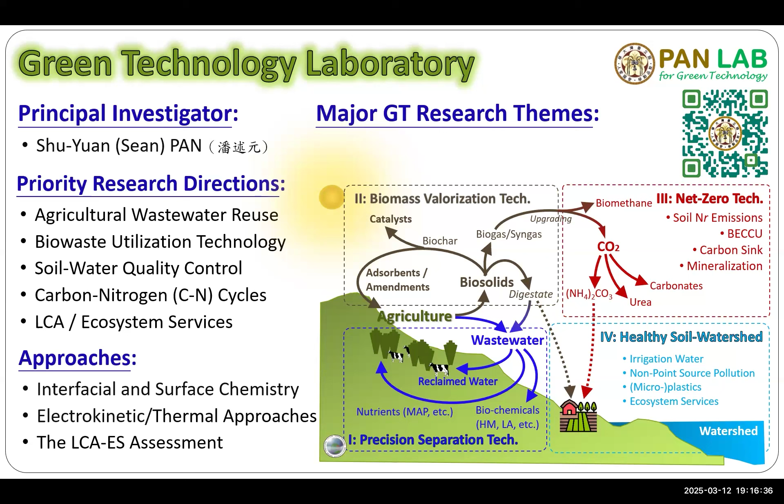Industry will sometimes discharge wastewater illegally, and this wastewater contains heavy metals. So another important domain for us is trying to identify hotspots for illegal discharge of wastewater from industry, which can impact food security and safety. So this is item number 4—basically we work on the environment in agriculture.

Today I would like to share with you about wastewater reuse. In the past 5 years we've tried to design very different mechanisms and apply them to wastewater reuse. One of the mechanisms is electrochemistry, which uses electricity to drive the reaction or separation.

You can imagine in the future green energy will be the major energy source. So the question going forward is how you can drive current processes, which today are driven by thermal or pressure, but in the future you'll need to drive these reaction or separation processes using electricity. So this is something very important.

If you see the report from the International Energy Agency, IEA, they point out the importance of electrification and its contribution to global greenhouse gas reduction. So I think this is one key research direction in my lab right now, especially for wastewater reuse.

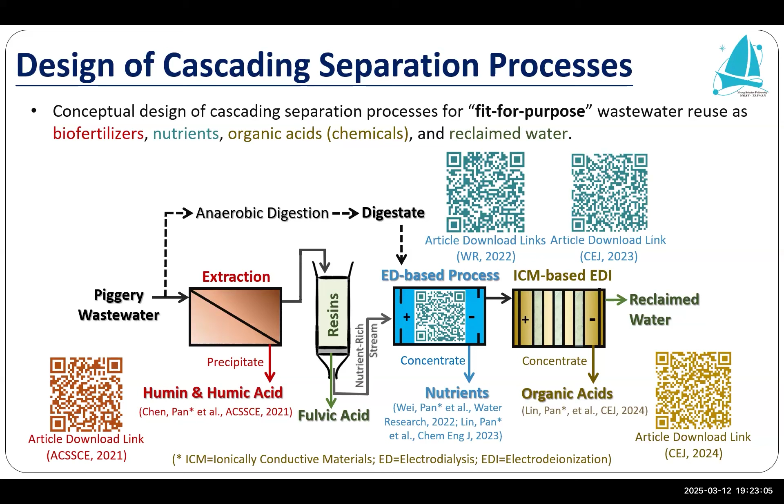For example, organic fertilizer - humic acid can actually be used as organic fertilizer, and fulvic acid can also be used as fertilizer. In addition to fertilizer, it can be used as chemicals in the pharmaceutical industry, with many applications. And nutrients - you know nutrients - are a kind of fertilizer too. So we target the purity of the product instead of just clean water in the process we designed before.

A few slides quickly showing some progress we have. The first slide shows organic molecular recovery from the piggery wastewater. As I mentioned, we use a series of unit processes trying to separate humic acid and fulvic acid by pH adjustment or adsorption using different resins. The purity is quite good - for example, humin we can get 100%, humic acid also 100%, and fulvic acid about 80 to 90%.

So far, we are also trying to apply this process to local pig farms. We're trying to have a small-scale kind of demonstration, showing the benefit to local pig farms of how this process can be used.

Another process we have, as I mentioned, is electrodialysis or ED - we can do nutrient separation using ED. One very interesting result is we can adjust the electric field and achieve nitrogen and phosphorus selective recovery. At low voltage, you can have a high removal or recovery efficiency for nitrogen. Once you remove all the nitrogen from the wastewater, you can increase the electric field to recover phosphate afterwards.

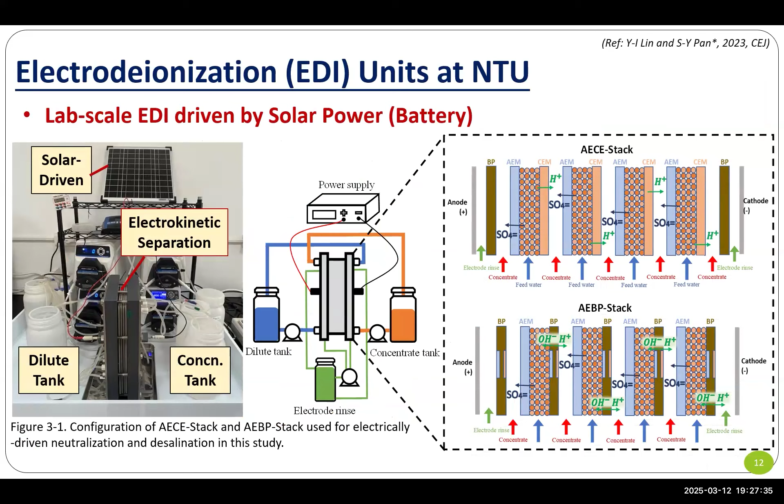We also have EDI, electrodeionization. EDI has conductive materials in ED, which is the biggest difference. Conventional EDI uses ion exchange resin to facilitate ion transfer. In our lab, we try to use fixed ion exchange materials to improve efficiency.

We also formulate different resins depending on what product we want and the concentration of the product in the wastewater, so we design different materials. One simple concept is: wastewater in, and you get three products out. One is acid, one is alkaline chemicals, and another is clean water. You can use these three different products in many different locations.

One example is the PET washing industry in Taiwan. They use chemicals for washing and produce wastewater. Right now they use a pressure-driven membrane process to treat wastewater, and we try to incorporate this new technology into their current process, generating chemicals that can be used back in their original process to wash the PET bottles.

I think this is a very important process, especially for industry, because we estimate the cost for the industry can be reduced by 90% every day, since they purchase a lot of chemicals daily and also pay wastewater treatment fees. So by doing this, you can avoid a lot of fees for industry.

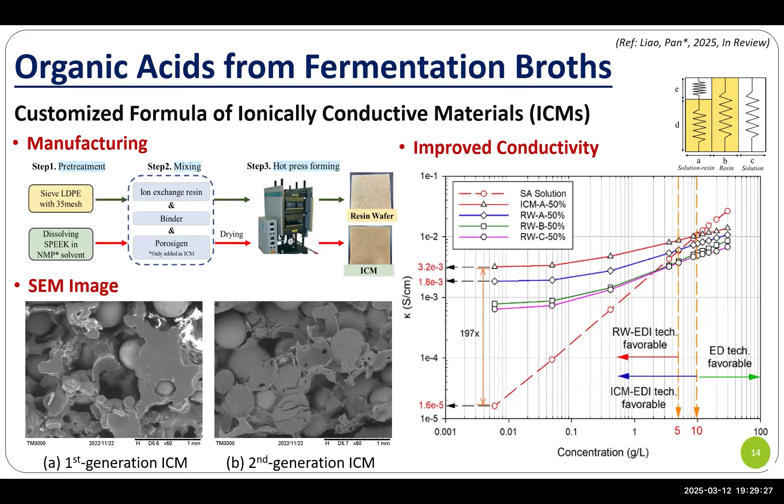This is the detail for the materials, but because of time I'll just skip the detail. The concept is we try to formulate different types of materials for different purposes, using different ratios of anion exchange resin, cation exchange resin, and binders. We need binders and also porosigens, and we try to design different formulas and evaluate the performance.

One target is fermentation using biomass growth. In anaerobic fermentation broth, you can produce organic acid, and succinic acid is one example, a very highly valuable product. We try to use the materials mentioned in previous slides to increase the performance of succinic acid recovery from the fermentation broth.

We also use the same materials for wastewater in the pig industry, but to recover ions, so different targets. So this is something we have worked on in the past.

The last slide today: we also try to work on something I feel is very exciting, because in the past, when you treat wastewater, you think we need to input more chemicals or energy. But we realize we can utilize the energy stored in the wastewater. At the same time, you can produce energy and also treat the wastewater. So this is what we call energy-extracting water technology.

For example, with neutralization, you generate a lot of heat because of the reaction. How can you utilize that heat to drive separation? This is the concept behind this technology. Or think of a battery, since it looks like a battery - a battery produces energy. So we also design different configurations of electrochemical separation that can produce energy at the same time.

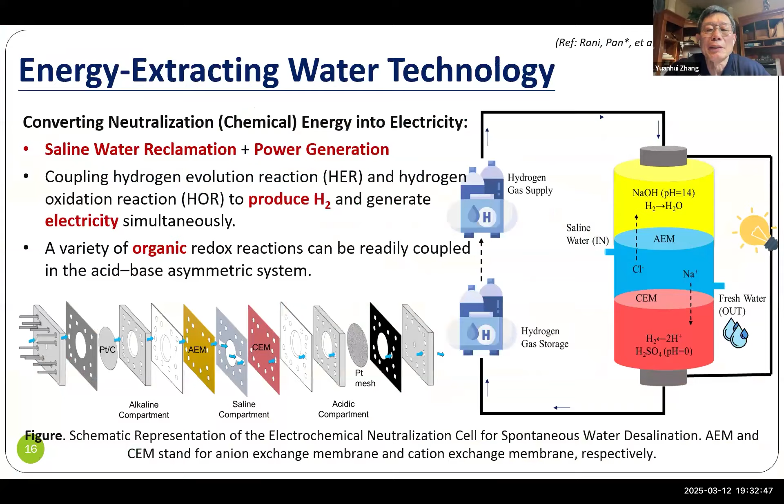Dr. Pan, when you use the shock technologies, what's the energy recovery at this point you can achieve? The one that you get from MIT, yes. Is there any improvement of the energy efficiencies compared with the existing electrodialysis technologies?

Thank you, Professor Zhang. Actually, that was one question I gave to my student a few days ago. We try to realize the energy efficiency for the shockwave ED right now. As I mentioned, because we avoid the use of anion exchange membrane, we expect the energy consumption could be lower. But from the aspect of energy efficiency, I don't know, to be honest. We need to check, compared to the conventional ED, which one will be more close to the thermodynamic limit. Actually, we are working on it right now. Okay.

So I would like to ask a question. We're seeing more and more work on circular bioeconomy and creating new products from things that we used to consider waste and trying to reduce waste. Are you performing any type of analysis of the benefits of circularity, or how we're transforming the system, that can be used to communicate to the public about the importance of these technologies?

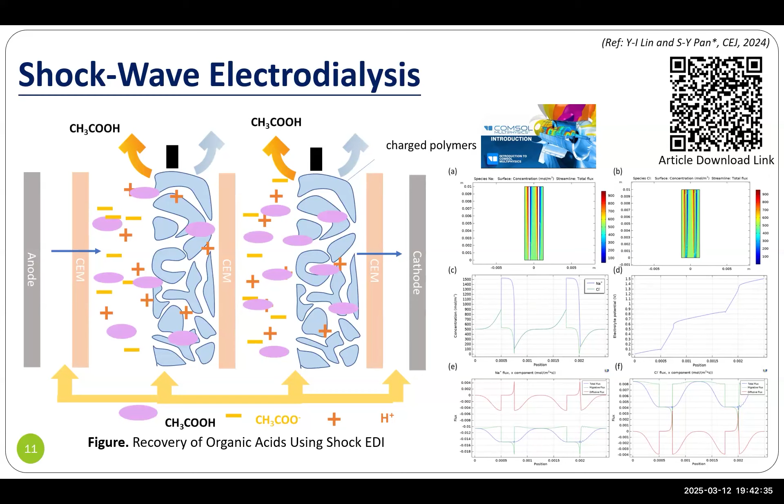Yeah, so thank you very much for Professor Pan's speech. I think it's time for us to move to the next speaker. So the next speaker will be Professor Zhang from UIUC. So when I did the preparation, I learned that Dr. Zhang is an expert in indoor air quality, and he has a lot of research about the effect of indoor air quality and occupant heating, ventilation, and air conditioning control. His team has developed and continued research on filterless air cleaning, and also the 3D velocity measurement method called PTV for a long time. So this is also my personal research interest, and we currently have a paper under review using the UV air cleaning system, and we verified the effect using CFU.

So back to today's topic, Professor Zhang combines waste treatment, water cleaning, carbon dioxide sequestration and biofuel conversion into one process. And he converted bio-waste, including animal and human waste, food processing waste, and algae into crude oil using thermochemical conversion.

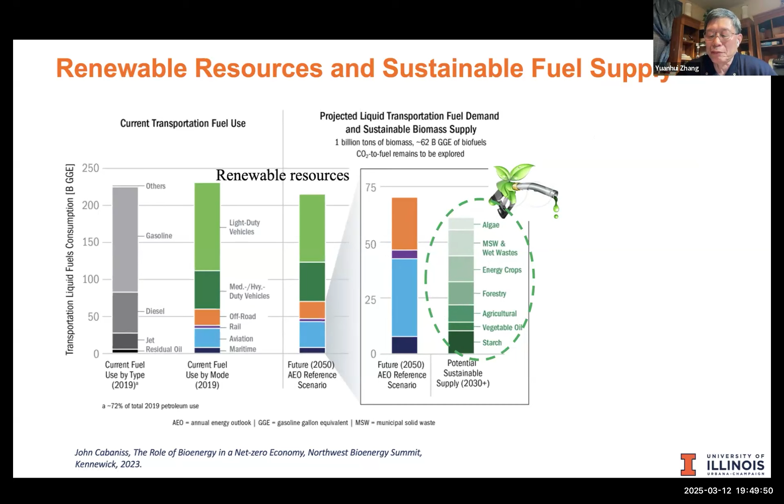So this diagram shows that of all those sustainable fuels, the collectible biomass contributes a substantial amount, anywhere between 50 to 70 billion GGEs of equivalent fuel. And this opens a whole new world of technology development, biochemical such as fermentation, or chemical reforming, or thermochemical, like pyrolysis, gasification, hydrothermal liquefaction, etc. So all those can use biomass. In particular, wet biomass constitutes a large fraction of the sustainable biomass supply.

So I'm going to use food waste as an example to demonstrate the research in my group over the past almost 2 decades, how we collect this biomass and treat it, all the way to jet fuels. The typical food waste is from restaurants, like on the top, and the more easily collectible food waste is food processing plant waste, which is readily available, already concentrated, and already pre-treated in terms of homogeneous status. This is a much easier, better feedstock to deal with.

Now, my group's research is focused primarily on hydrothermal liquefaction. It's a subset of thermochemical conversion. The mainstream theory today is that all the fossil fuels on Earth come from some kind of hydrothermal liquefaction. In theory, the biogenic theory, petroleum crude oils come from algae and coal from wood and peat, and natural gas from either of them, under higher temperatures and pressures, sort of through hydrothermal liquefaction over a time of billions of years.

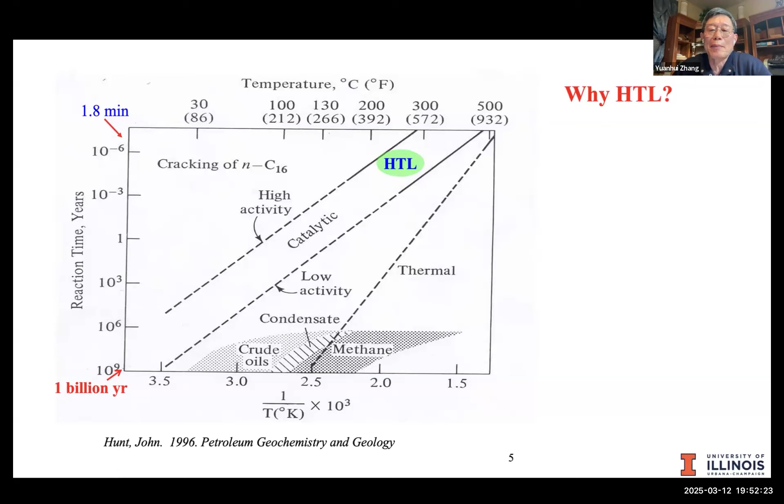So that is Professor Hunt's study. His whole life was dedicated to the origin of fossil fuels. He visited more than 80 countries, dug out more than 150 geological samples, and proved that this is the mainstream theory.

And in the US, the DOE recognized HTL as one of the major pathways for renewable energy in the 2017 report. So there is potential in this. That's why this area of research gained popularity.

Now, this gives you an overview or pathway of this whole work. This diagram is actually from one of the ongoing projects, showing how to convert to biofuels and byproducts, and in the end achieve the circular bioeconomy. My lab is dubbed the Environment Enhancing Energy Lab in our department, and in general it converts wet waste to transportation fuels. Right now, in particular, we focus on sustainable aviation fuel.

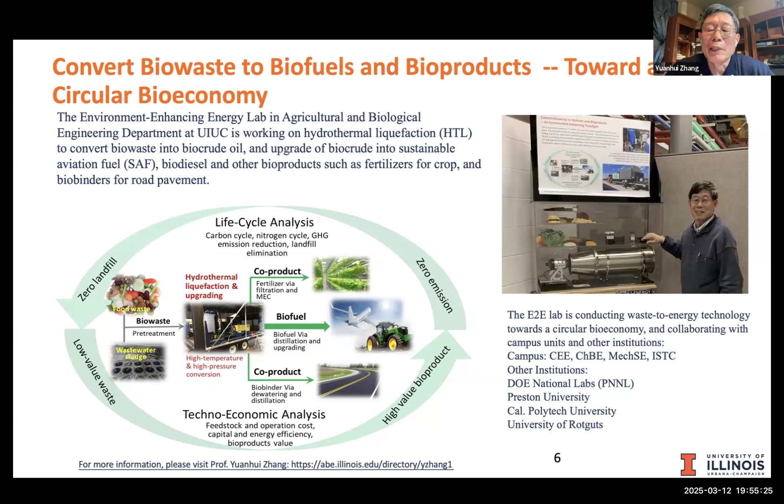As this displays, we collaborate with an array of institutions and units both on campus and off campus. On campus, we particularly collaborate with civil and environmental engineering, chemical engineering, and mechanical science engineering, and off campus with the DOE national labs and other universities.

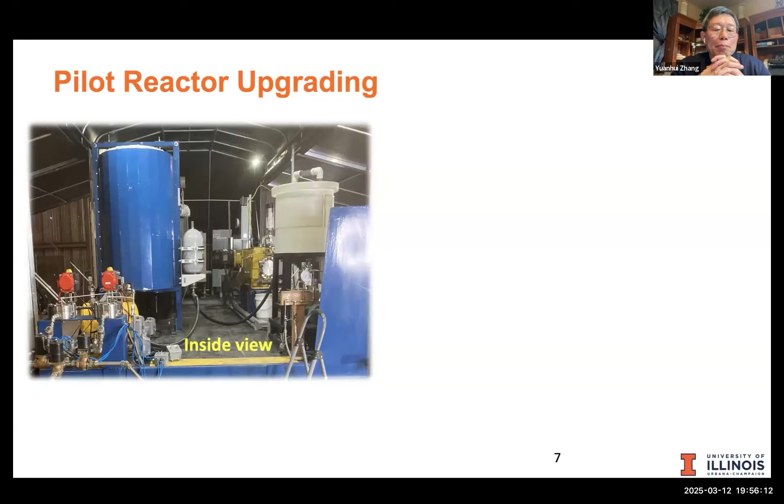Now, to give you a taste of this whole process, I'm going to skip all those lab scale reactors and lab scale analysis. I'm starting with our pilot reactor. The reason is, as far as I know, my lab is probably the only lab really operating at this pilot scale. This is the inside view of this hydrothermal liquefaction pilot reactor. And this gives you a grand view of the site. The reactor is inside this trailer.

And this one we are actually hauling to a site to treat an algal bloom. That's a US Army project we did 2 years ago. With these reactors, we are capable of processing 1.5 to 2 tons of bio waste per day. With this kind of capacity, we are able to produce ample amounts of crude oil and wastewater for downstream research, meaning upgrading the crude oils and utilizing the wastewater for other purposes. Without this process capacity, we wouldn't have the materials or precursors for the downstream research.

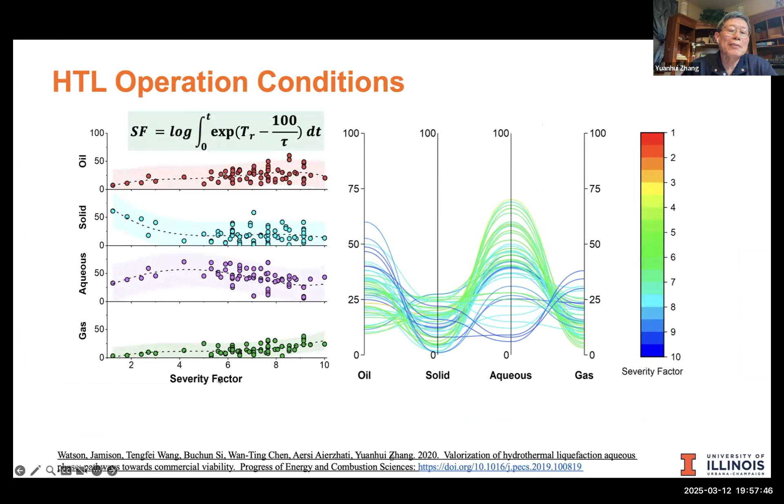So another overview: with any different feedstock we put through the pilot reactors, we do screening tests to optimize the operating conditions in terms of temperatures and retention times. We use the severity factor to determine under what conditions we can get the best oil yield and quality. So we do more detailed lab work. Every time before we run the pilot reactors, we do an array of lab tests for determining the operating conditions.

This is a little bit of detail. I'm going to just use this as an example. This is a major piece of work converting food waste to jet fuel. We're starting from two types of food waste, one from restaurant or supermarket food waste, and the second from a local food processing plant. And here is the result. Through this reactor, the bottom of this diagram shows the bucket of crude oil. And on this side, you see the crude oil and the wastewater.

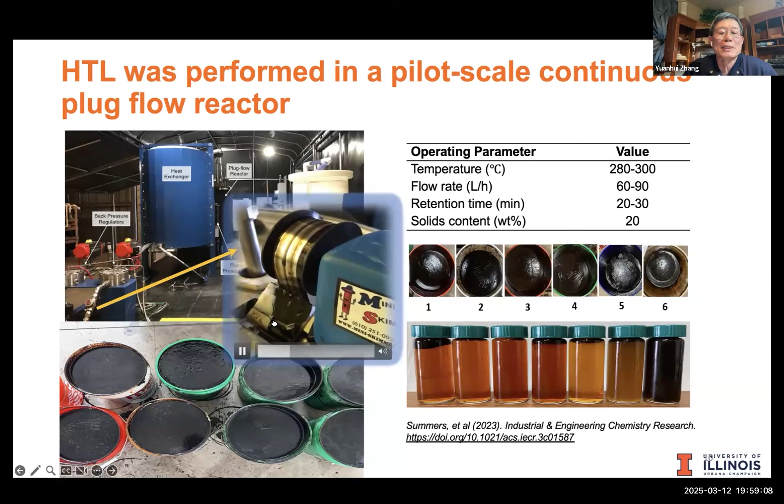This gives you a sense of how we got these oils: this is the outlet, and then we can skim off the crude oil. With the ample amount of crude oil, we can do downstream research. In particular, right now we focus our efforts on upgrading the biocrude oil into sustainable aviation fuels. This study was published almost 2 years ago. Now, this gives you the efficiencies. Those data are all from our pilot study.

This gives you a taste of the carbon recovery right here and energy recovery. US DOE is particularly interested in carbon recovery. The baseline traditional waste treatment is anaerobic digestion, and in the literature we agree the ceiling is about 30 to 35% carbon recovery. With this approach, HTL, we already proved just through the biocrude oil product, as you can see from the diagram on the right, carbon recovery achieved 60 to close to 70%, and energy recovery is close to 75%. Those pilot runs demonstrated the huge potential in terms of both carbon recovery and energy recovery.

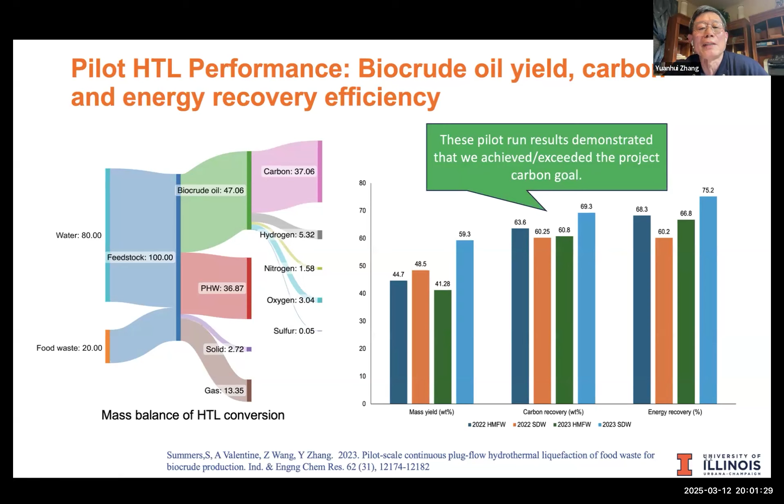And this only includes the crude oil fraction. As I mentioned, the wastewater fraction and the solid fraction still contain about another 30% of the nutrients and carbon, which is the energy. Like the previous presentation by Dr. Pan, we can further recover the nutrients, carbon, and energy from the remaining waste stream. So this demonstrates that just from the biocrude oil production part, we already achieved much higher recovery efficiencies compared to existing technology. So this is some of the analysis.

So my lab in the past two decades or so basically established the whole pathway from collecting the food waste, putting it into the hydrothermal liquefaction reactor, doing the separation, and then the pre-treatment, and at the end, we are doing the upgrading. So first is the pre-treatment. Pre-treatment includes removing water, removing ash, salt. Those we consider as pre-treatment.

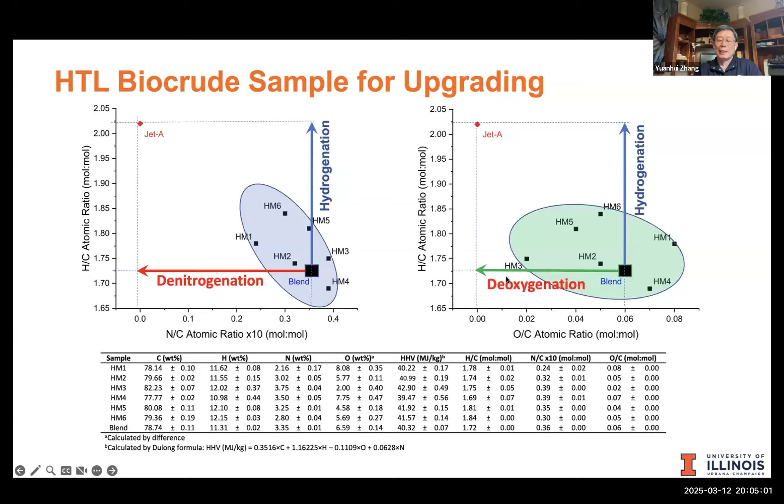Okay, then how to achieve that? Our biocrude oils, even after the pre-treatment, are still very much scattered all over the place. So our job is to do deoxygenation, denitrogenation, and at the end hydrogenation as well. So to achieve this, this is the simplified version. To achieve the jet fuel, for example, other fuels are the same thing, maybe simpler or easier upgrading processes. So we go through denitrogenation and hydrogenation, or deoxygenation and hydrogenation, or sometimes all those combined together. Then we can get the fuel.

This is our recent result. Actually, we have three slightly different approaches. I saw that the student who is mainly leading this research, Sabrina Summers, is in the audience. So those are the works. We are still ongoing, but this one is one of the examples we got.

Through all this process, as I described, we had enough of the samples to perform the FAA tests. FAA stands for Federal Aviation Administration. It's the major government regulation and administration in the US. So we follow the FAA SAF standard. We call it the tier alpha and beta test. And through this alpha and beta test, we proved our product and our process. These are from the food waste, originally from the food waste.

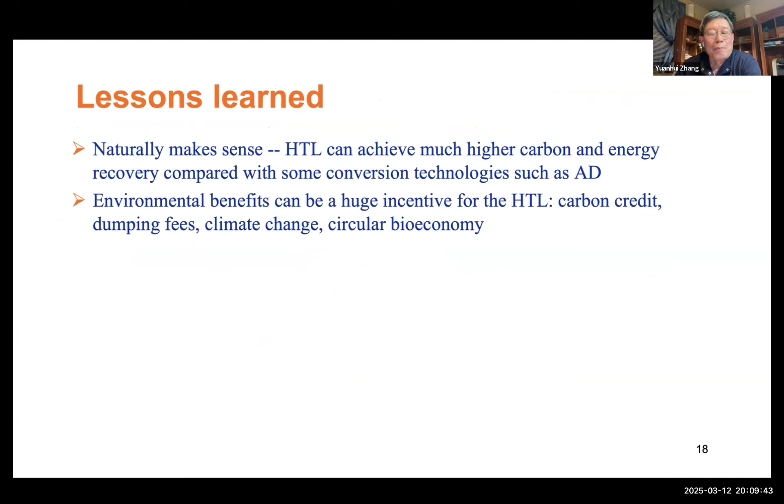So that's the technical part. We do have a few lessons. Through this process, HTL naturally makes sense and has huge environmental benefits if we count carbon credits and waste dumping fees. But there are lots of technical challenges—high temperature, high pressure—and there is no such industry yet. Everything is at the infant stage. There are economic challenges too, as long as fossil fuel is cheap. We estimated that as long as it's less than $100 per barrel, this is hard to compete with.

But once it's beyond $100 per barrel, this could be competitive. So we are still learning, more lessons to be learned. I want to acknowledge the graduate students, the researchers in my group, and the funding agencies through many years of research. Currently we are doing two projects for DOE and one project for USDA. We just finished a project with the US Army. With that, thank you for your attention, and I will enjoy your questions.

There's one question online that we have time for, Yuanhui, from the Taiwan audience: Food waste consists of various components, and when collecting food waste, its composition may vary due to seasonal changes or different sources. This variation can affect the final product yield. How do you address this issue?

It's a very complicated question, a multi-million-dollar question. Indeed, treating food waste is complicated first because it comes from different sources with different biochemical compositions. So that's one of the research areas we are doing now—trying to develop a comprehensive model. There are a couple of models already floating in academia or literature, but we try to improve the model both from a chemical reaction point of view, based on Arrhenius equations, and from a mass and heat transfer process point of view.

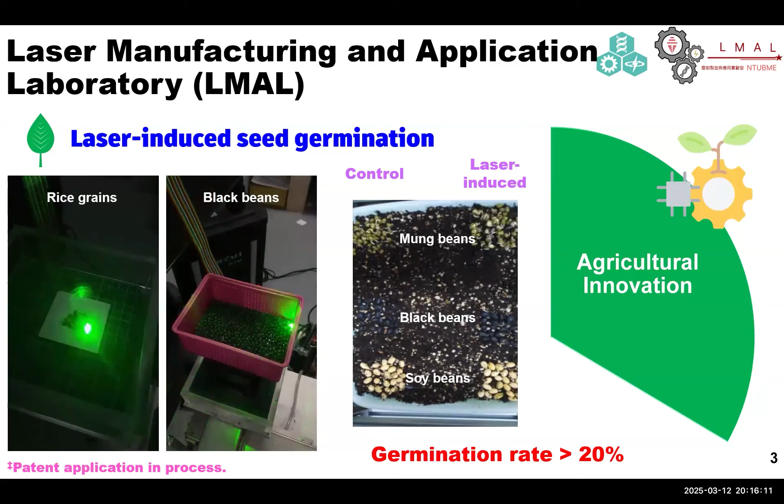The result shows that mung beans have the greatest response to the laser light, and we can increase the germination rate by up to 20%. I think this is good news to farmers, to increase crop yields and reduce waste.

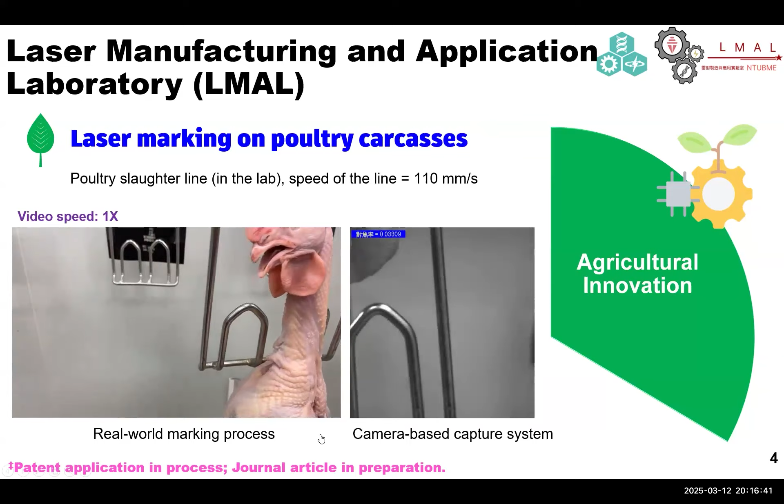Next topic, which we have done before, is laser marking on poultry carcasses. We wanted to simulate the poultry slaughter line. As you can see, we built a laser on-the-fly marking system in our lab to mark a logo pattern on a chicken neck. This is the real-world marking process, and we use a camera-based system to capture every single chicken neck to make sure we have marked correctly.

This is the actual speed of the video. If we slow down the video, as you can see here, the laser light is coming on, so we can mark the logo pattern on the chicken neck.

Our goal is to achieve traceability for food safety, so we want to make unique information on every single chicken.

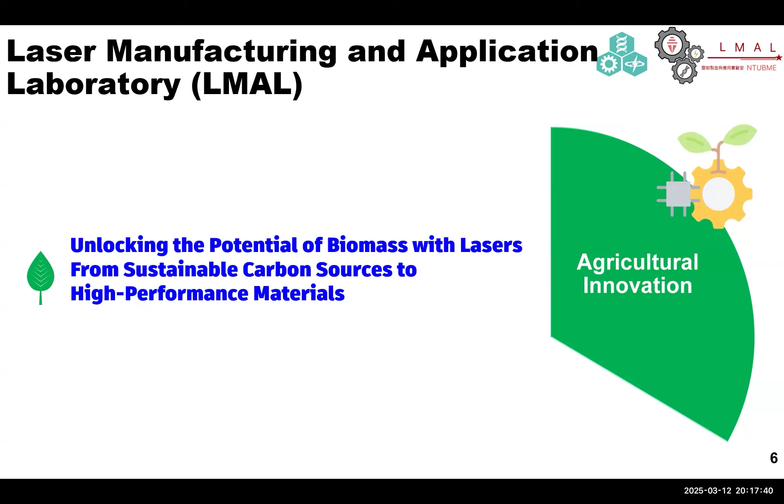Due to the time limitation, I will skip the details. Today I'm going to talk to you about unlocking the potential of biomass with lasers, from sustainable carbon sources to high performance materials. We are not just playing with lasers, we want to make the world a better place.

I think our research aligns with the UN's SDGs, for example SDG 7, affordable and clean energy; SDG 12, responsible consumption and production; and SDG 13, taking action on climate change. So we want to use the laser to treat the biomass.

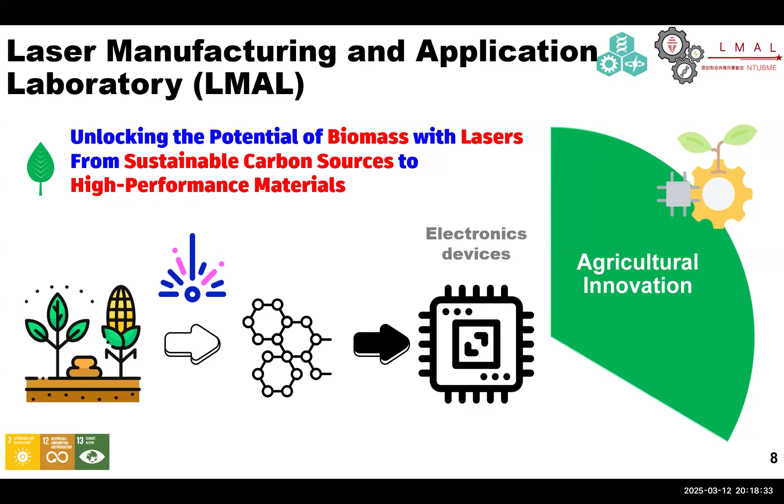The biomass can be food waste, like Professor Zhang mentioned before. We put the biomass into the laser system, and we can turn it into high value material, for example graphene, so that we can make electronic devices, like sensors. But as you can see, there is so much e-waste recently.

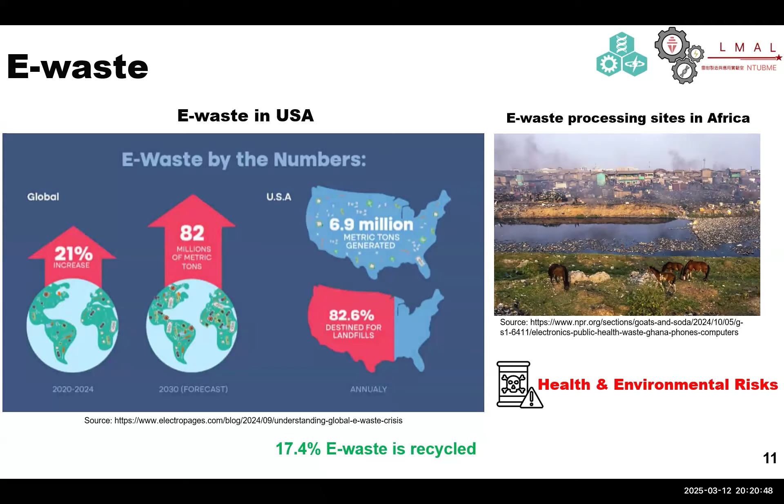So how can we balance technological advancement with environmental sustainability? I think this is a question we all need to consider. When we develop technology, we need to consider its impact on the environment and its conditions.

Circular economy focuses on making the most of existing resources, so it's just like recycling. However, bioeconomy is like recycling plus creating new sustainable material from biological resources. That's what we call biomass. So it shows the potential here.

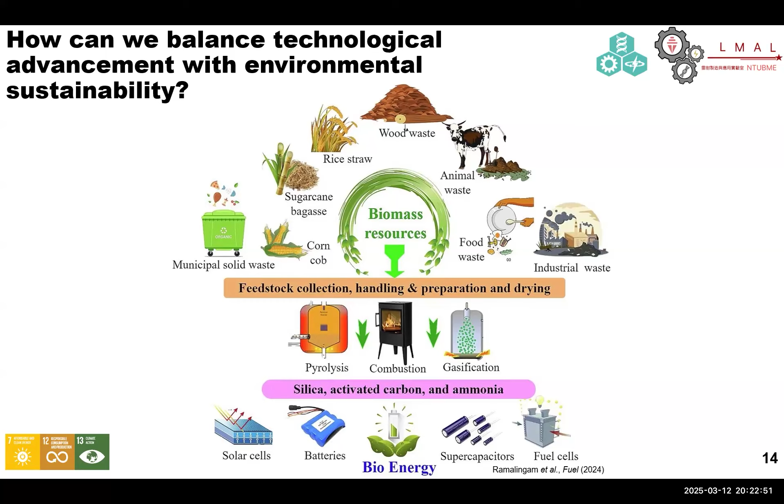In our lab, we use a non-conventional way to treat the biomass: laser material processing. We use the laser beam to break down and treat the biomass into high performance material and try to build electronic sensors.

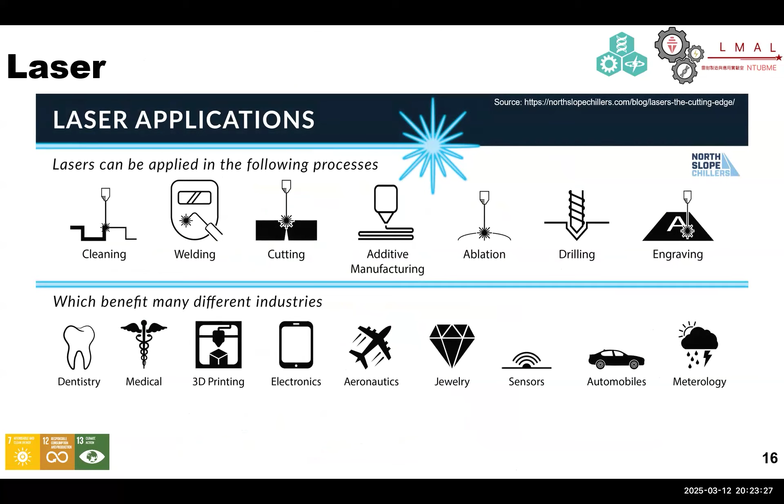Okay, so as you may know, laser can do almost everything. You can do cleaning, cutting, engraving, drilling, and things like that. And we can use the laser in so many places and areas. And how about agriculture? I think, of course, we can use the laser on agriculture.

So when we prepare all this biomass material, then we can do the laser modification, try to use the laser to turn the biomass material into graphene. So what is the advantage? It has lower environmental impact, biodegradable, biocompatible, and even cheap.

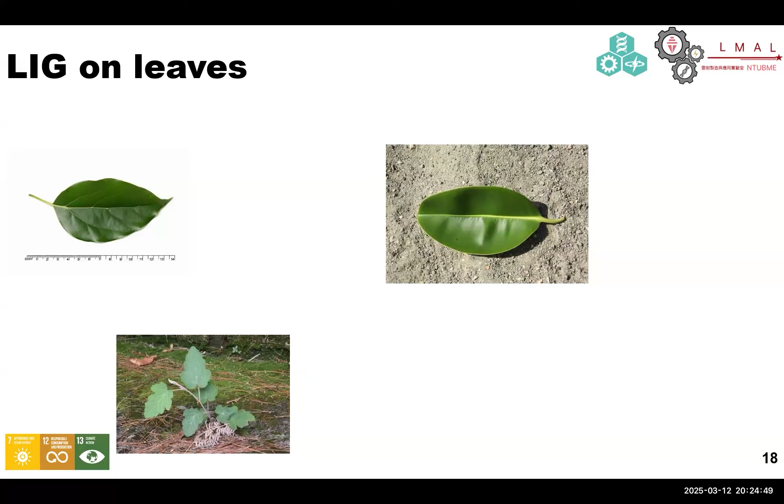Okay, so why leaf? Why did we choose leaf? I think it's all about the flexibility. The flexibility is quite important for our wearable sensor. So we have done 3 or more leaves, and tried to use the laser beam. This is on the left corner.

Here is the same Cinnamomum camphora tree, this is the name of the leaf. And we have successfully done the graphene on the surface of the leaf. As you can see, this is what we got, the lowest resistance on it, in a range of 30 to 50 ohms.

And we also did the Indian rubber tree. As you can see on the right-hand side, we can also successfully produce the graphene on the surface of the leaf. We also did some other plants. So this is what we need to get flexible, biodegradable, and wearable material from the biomass.

And when we use a new technology, we need to know how the power is consumed and what the environmental impact is. So we use a precision power meter to measure the electricity when we are doing the laser material processing. So this is just an example.

So if we use a 30 watt laser system and run it for 1 hour, we get 1.2 times 10 to the power of -3 kilowatt hours. This is for 1 hour. And if we run the system for 24 hours, it only uses 2.88 times 10 to the power of -2 kilowatt hours of electricity.

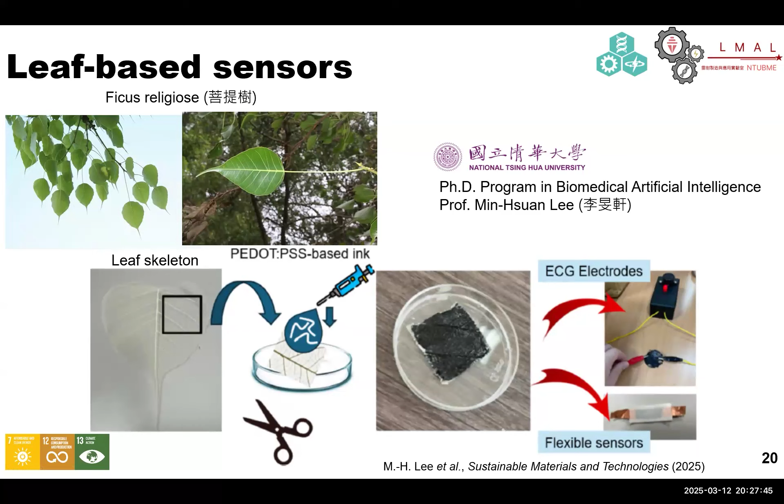So this leaf-based sensor is biodegradable and biocompatible, and we can use this sensor for health monitoring and disease diagnosis.

Okay, so we are just scratching the surface on the biomass issue, and we are committed to exploring more applications of the laser in biomass. We will do some life cycle assessments to make sure that this is a sustainable process.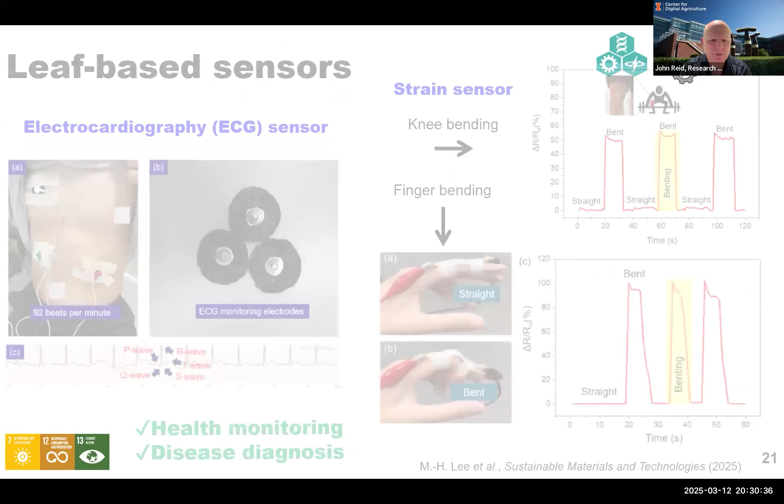Thanks for Professor Reid's question. I think this issue is very important when we are doing the sensors. As we create the leaf-based sensor, it is biodegradable, so the lifetime is not very long. We are still doing the experiments. When we use this kind of sensor, I think it lasts only 7 days, approximately 1 week. So after 1 week, we need to do some calibration of the electrical signal. Yeah, thank you.

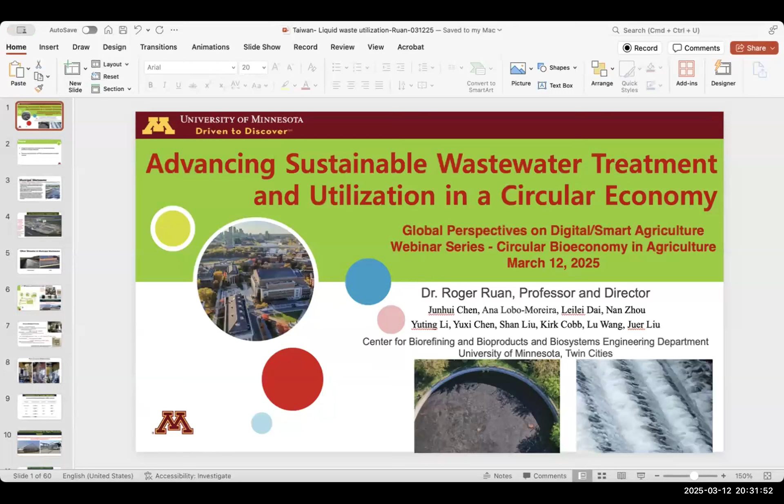The fourth speaker is widely recognized for his research in biomass and solid waste conversion, including plastic waste pyrolysis and gasification for the production of chemicals, materials, fuel, and energy. And his work extends to innovative wastewater treatment solutions, airborne pathogen disinfection, microwave catalytic technologies, and food engineering advancement.

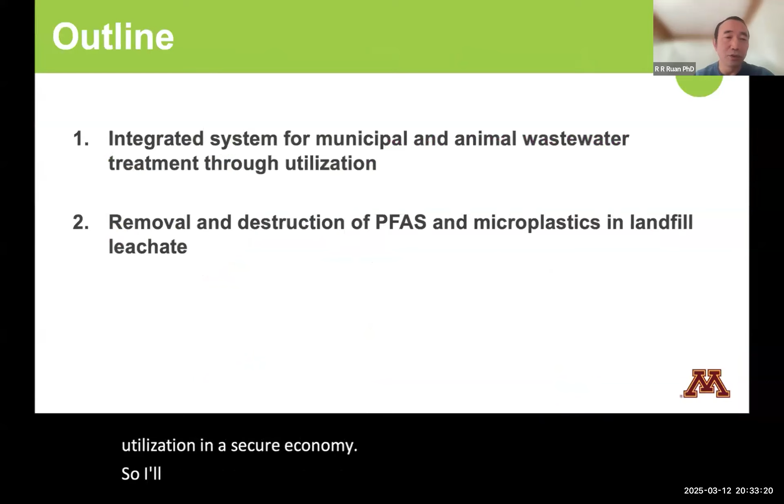So I'm going to focus mainly on wastewater, how to advance sustainable wastewater treatment and utilization in a circular economy. I'll focus mainly on the integrated systems for municipal wastewater treatment through utilization, and the removal and destruction of PFAS and microplastics in landfill leachate, and also landfill management in general. So I'm going to talk about some of the technologies related to these topics.

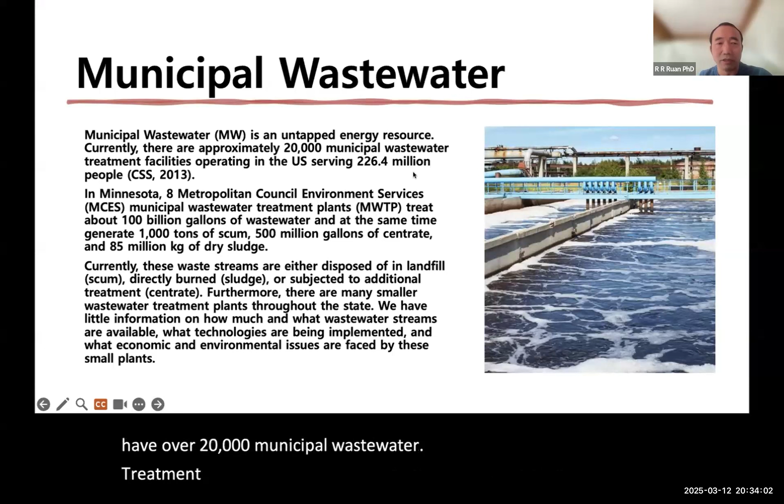We know there are all kinds of wastewater resources, right? Even in Minnesota, we have only 8 wastewater treatment plants, but they treat about 100 billion gallons of wastewater. And in the U.S. we have over 20,000 municipal wastewater treatment plants, serving over 200 million people. This, for example, is the St. Paul wastewater treatment plant. It treats wastewater from the Twin City area where I live, about 200 million gallons a day.

Right now, they are still mainly using the traditional aerobic and anaerobic type of wastewater treatment process. So you have to pump a lot of air into this wastewater for the aerobic bacterial process, and that generates a lot of CO2 into the air, polluting the air too. And the AD process also generates a lot of methane gas, which also goes into the air. All these are contributing to greenhouse gas emissions, right?

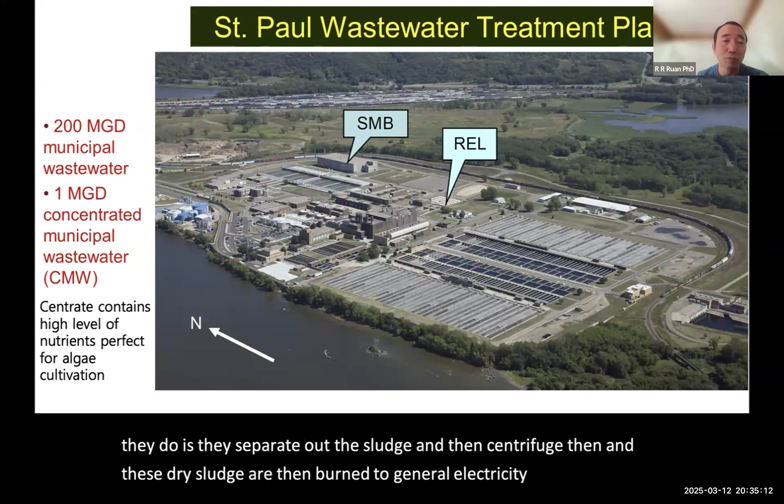And for the sludge itself, right now they separate out the sludge and centrifuge it. This dry sludge is then burned to generate electricity, because you need so much electricity to pump air into the system. That's why they try every effort to save some of the electrical energy. In fact, this Twin City wastewater treatment plant is a top 10 electricity user in the whole state, mainly because you need so much air pumped into the wastewater.

As I mentioned, this sludge is separated out using a centrifuge and then burned to generate electricity. When you separate the water out of this sludge, the volume is not very large, only about 1 million gallons a day. But these 1 million gallons contain over half of all the incoming nutrients that day. And right now, this very concentrated wastewater separated from the sewage sludge is returned back to the beginning of the wastewater treatment plant to be treated again.

That's why if we can actually use this centrate wastewater, then we can save half of the wastewater treatment load. That will save a lot of electricity, right? And also on the incoming wastewater, there's a lot of floating scum.

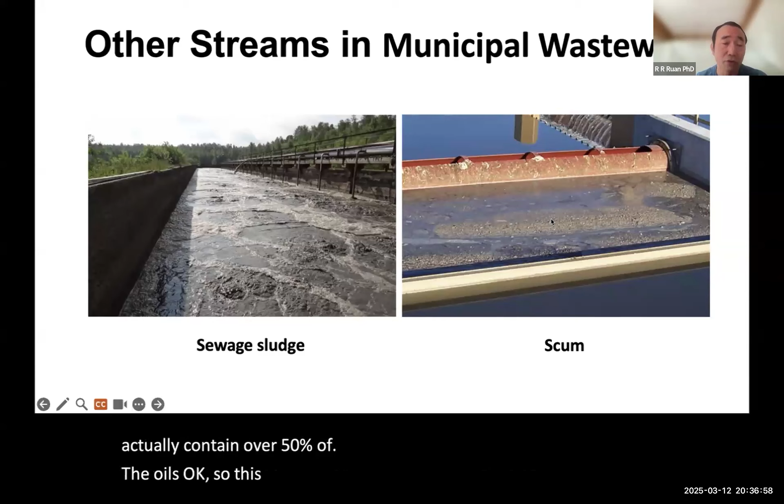And these floating scums actually contain over 50% of the oils. This oil, of course, is heavily used with a lot of free fatty acid, but they are floating on this wastewater. Right now they have to collect it and send it to the landfill site to be landfilled, mainly because when you add this kind of scum onto the sludge to be burned, it actually gums up the sludge and makes it so difficult to handle. So that's why they have to ship out this scum to the landfill site rather than burn it.

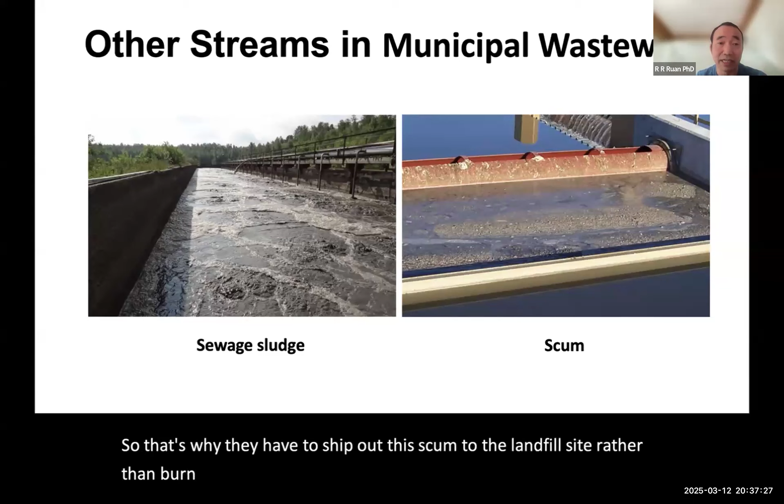And so this has high energy content because there's so much oil in this scum, right? So our idea is to try to utilize every component of these nutrients, of these resources, and turn them into valuable products. So we're using this new process that we developed to convert the scum into biodiesel, and then the centrate I mentioned has a very, very high nutrient concentration. We use it to grow algae, for example, and then the remaining sludge can be burned, pyrolyzed, or gasified to generate electricity, biochar, and so on.

So this, for example, is the scum to biodiesel process. This is quite unique, because this scum contains heavily utilized waste oil. After oil is used so many times, it contains a lot of free fatty acid. The traditional way of converting this kind of waste oil to biodiesel is through two separate processes. The first is acid catalysis: you react free fatty acid with methanol using acid as catalyst, but this process is usually done at 60 degrees, so you have a lot of water in the product. It's an equilibrium process, and under this low temperature not much water can be evaporated, so the free fatty acids cannot be completely utilized.

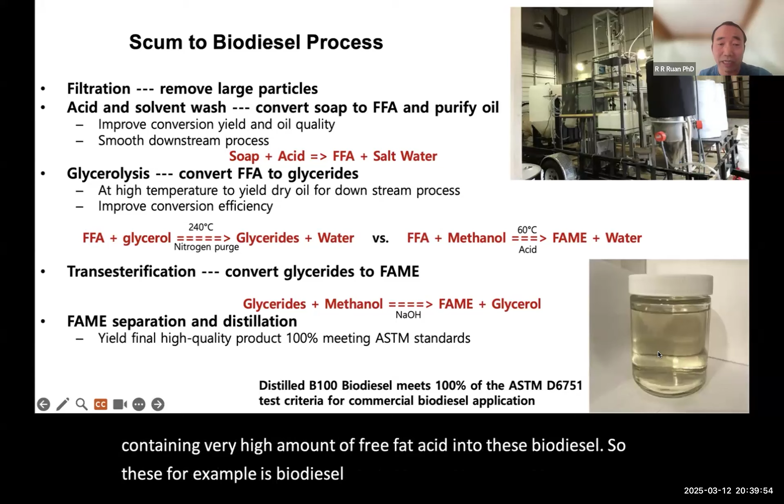So we developed a new process. We first add glycerol to convert these free fatty acids into glycerides, and the temperature is much higher than 100 degrees, so all the water is evaporated. Now these glycerides can be converted into biodiesel simply using an alkaline catalyst. So you can completely utilize all of this waste containing very high amounts of free fatty acid into biodiesel. This biodiesel produced actually meets 100% of the ASTM standard for biodiesel application. And this is the pilot system that we developed to convert these scums into biodiesel.

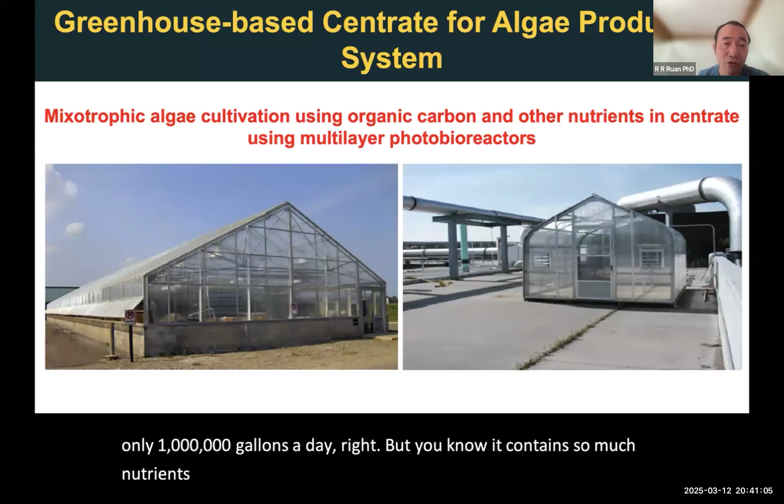And now, the centrate is the wastewater separated out from the sludge. As you can see here, the centrate contains a very large amount of COD, over 2,000 ppm, and a lot of nitrate, ammonia, and phosphorus too. This nutrient profile is almost perfect for algae production. So we developed an on-site demonstration system right at the wastewater treatment plant, using a greenhouse-type algae cultivation system to utilize the centrate wastewater. The centrate is only 1 million gallons a day, but it contains so much nutrients and it's perfect for algae production. So this is the system you can use to grow algae from the centrate.

And because the nutrient profile is so perfect, you get about 95% COD reduction in less than 2 days, and phosphorus and nitrogen, almost 70 to 90% are gone in 2 days. The algae harvested, of course, you can't use for feed or anything like that because it's from municipal wastewater, but you can convert it into biofuels. In this case, we compare the algae bio-oil to wood bio-oil, and you can see that the heating value is much higher than bio-oil from traditional cellulosic biomass.

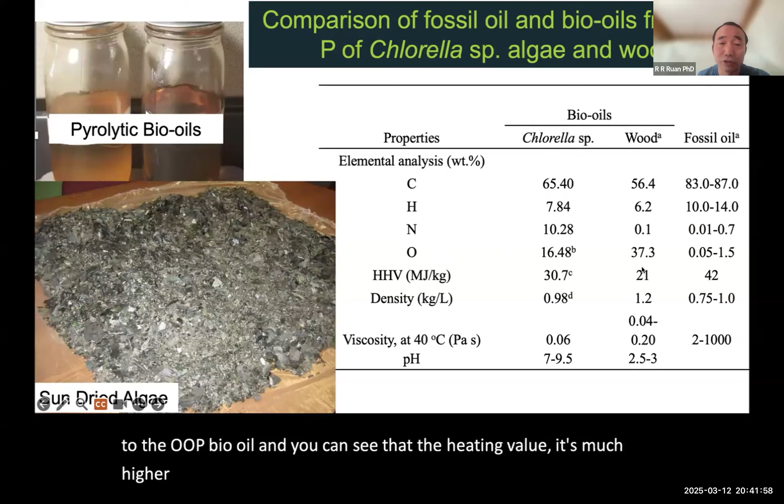But the key is, the pH here is very good. It's over 7, not the very, very low pH of bio-oil produced from traditional cellulosic biomass. And so these bio-oils can be 100% mixed with gasoline as a fuel, so you can use it for engine fuels.

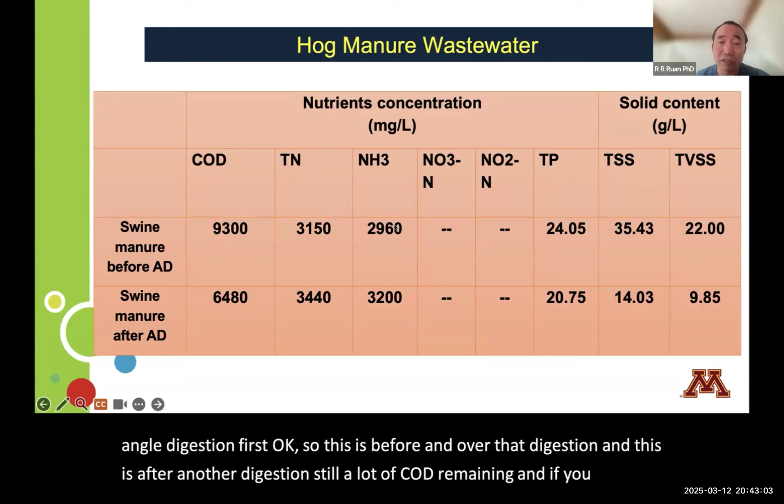Now, for the animal wastewater it's a different story. For example, hog manure, which we have a lot more of even than human wastewater. Normally it's treated through anaerobic digestion first. So this is before anaerobic digestion, and this is after anaerobic digestion. Still a lot of COD remaining, and if you look at ammonia concentration before, it's less than 3,000, but then after that, it's over 3,000.

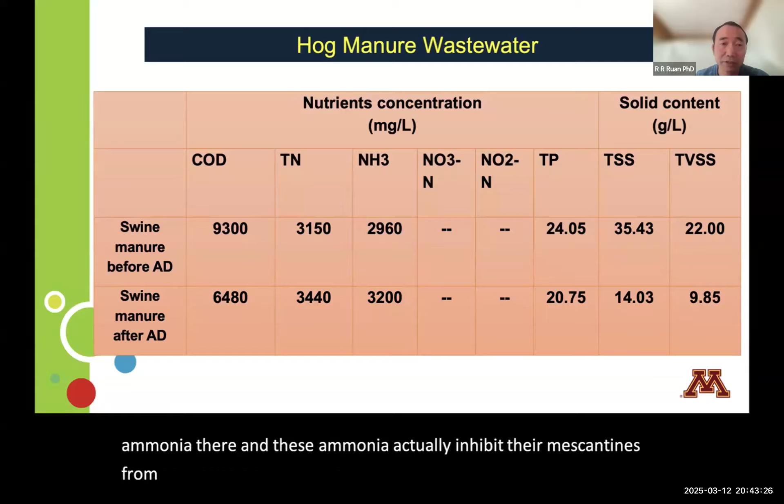Why? Because there's a lot of protein residues in these animal wastewater, in the hog manures. After the digestion, after breakdown, you produce a lot more ammonia. And this ammonia actually inhibits the methanogens from methane production. So we have to develop an integrated process. We have to pre-treat these to remove some of the ammonia and then absorb with acids to produce ammonium sulfate, for example, as a fertilizer. And after these inhibitors have been removed, you can produce a lot more methane.

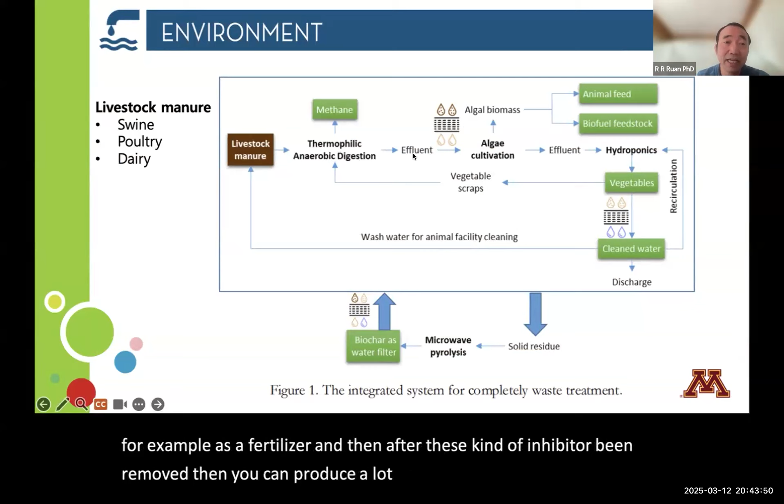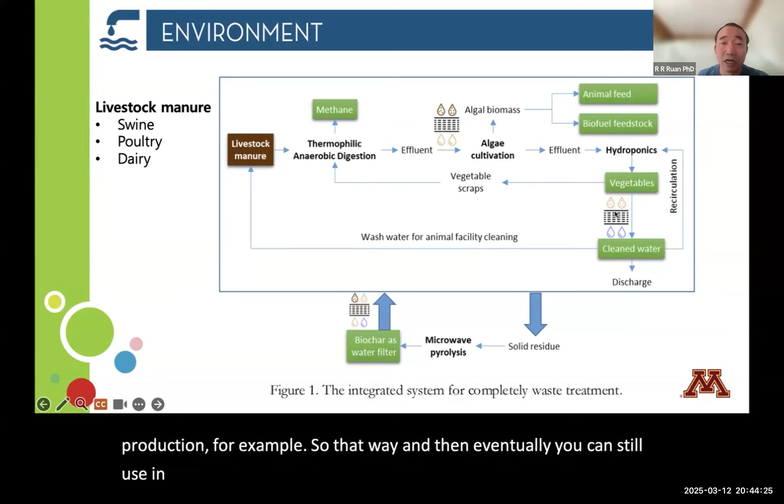And after that, as I mentioned, you still have a lot of nutrients in the wastewater after this AD. So then we can use biochar to condition this wastewater, and then the wastewater can be used for algae production. Then we can further condition the wastewater after the algae production. After algae is harvested, we can use that remaining wastewater for hydroponic plant production, for example. And eventually you can still use biochar to further condition the water, filter and absorb the nutrients in the remaining water, so the water can then be discharged or reused.

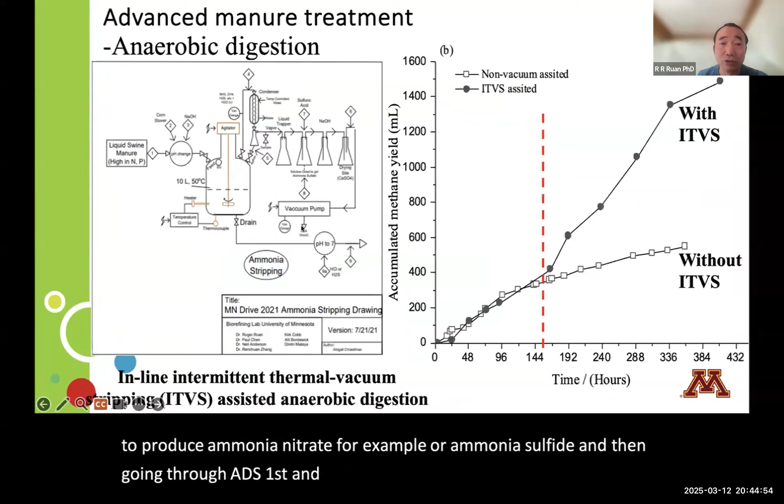So these are the animal manures coming in, and then we go through this intermittent vacuum treatment to remove the excess ammonia, to produce ammonium nitrate, for example, or ammonium sulfate, and then going through AD first, and then the algae production. You can see without this pretreatment, the methane yield is much, much lower compared to with the pretreatment. With this intermittent removal of the inhibitors, the methane yield increases dramatically.

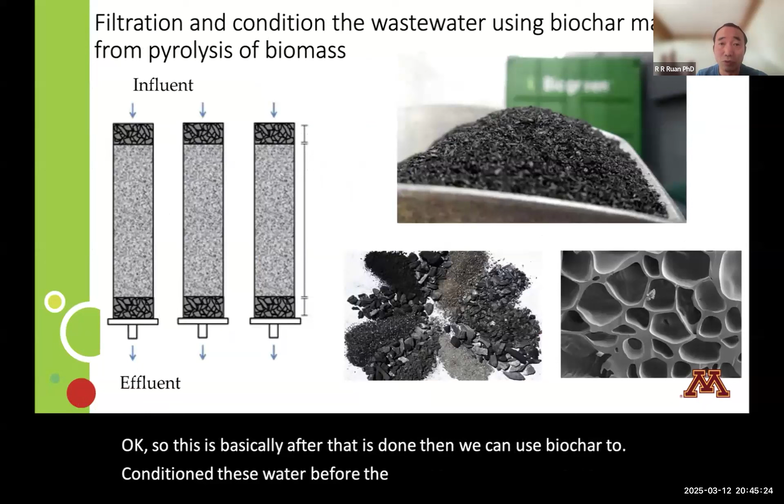After that is done, we can use biochar to condition this water before the algae cultivation. We remove suspended particles, remove some of the color and so on. That actually helps the algae cultivation. And this biochar can be produced from all kinds of biomass using the pyrolysis technique that I will mention later. And then after that, we can use algae to cultivate on this AD wastewater.

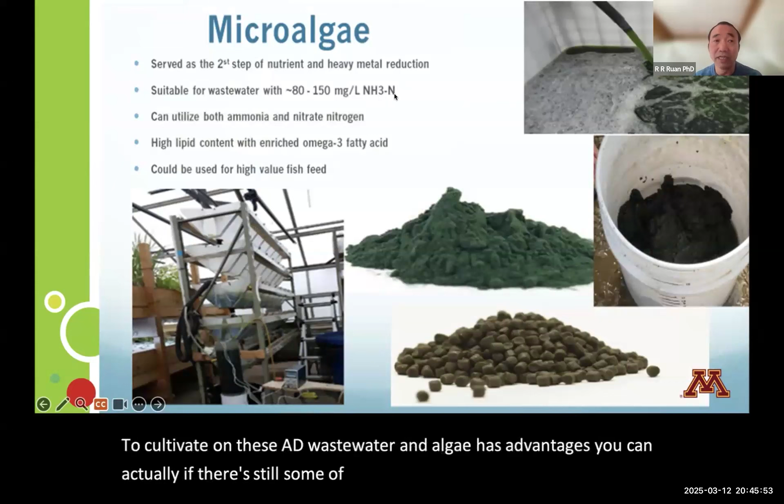And algae has a lot of advantages. If there's still some ammonia in there, that's okay. And also, if you have heavy metals, we often add different heavy metals, copper and zinc and so on, into the feed. So you have a lot of heavy metals in different animal wastewater, including hog manures. Those heavy metals can also be absorbed by the algae.

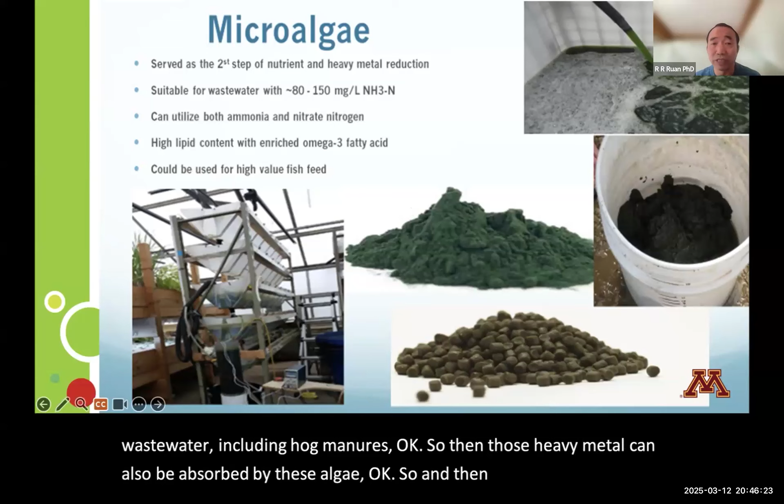If you don't have those concerns, you can use these algae as a feed also, rather than as biofuel. But of course, you can use these algae as biofuel feedstock, as I mentioned earlier. And then those heavy metals can be concentrated in the char too. So this is the AD wastewater after conditioning for the algae production.

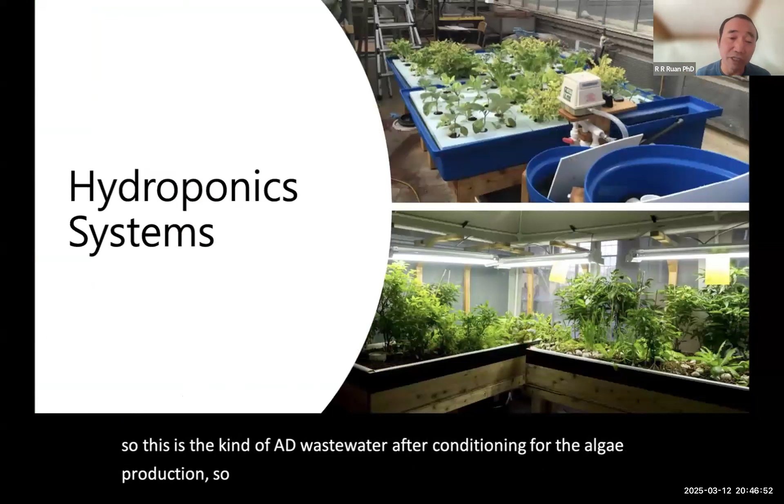And after that, you can further condition the wastewater after the algae cultivation. That wastewater still contains nutrients, good for hydroponic plant production. So we grow all kinds of vegetables in these hydroponic systems. These are different vegetables, and we work with local industries on some indoor hydroponic and aquaponic systems for vegetable and fish production.

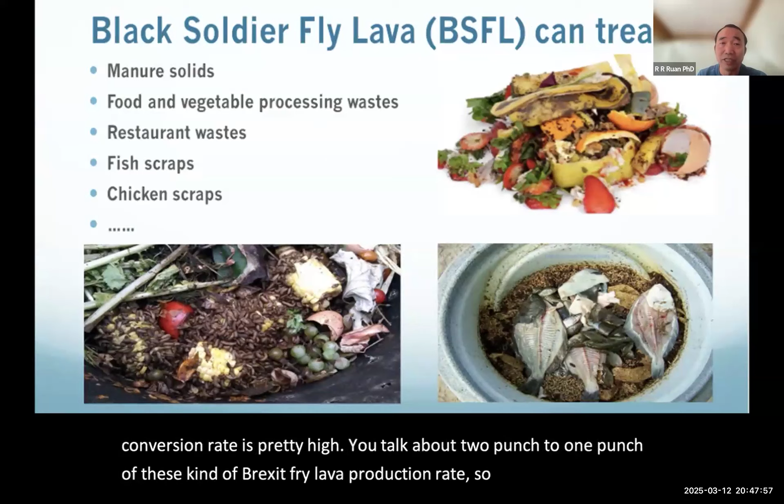Now, after this vegetable and fish processing, there's a lot of waste, and a lot of other food waste too. You can use those to grow black soldier fly larvae, for example. And the conversion rate is pretty high, about 2 pounds to 1 pound of black soldier fly larvae. So it's quite efficient in utilizing all this waste to grow worms and so on.

And for the remaining, if needed, you can use so-called high temperature solid waste composting systems. Simply by pumping air, providing the necessary air to control the temperature, you can quickly convert these materials into compost and inactivate some of the bacteria and viruses at the same time, because you can control the temperature very high, close to 80, 90 degrees centigrade.

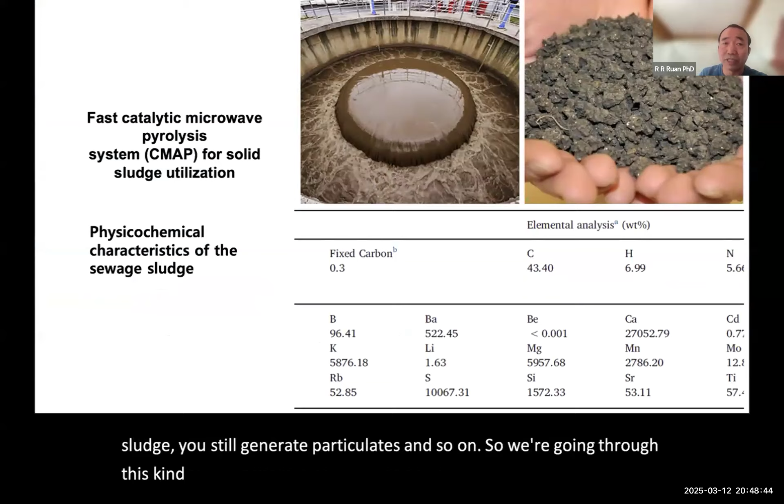And I mentioned earlier on the sludge itself from the wastewater. Right now they simply burn the sludge. But when you burn the sludge, you still generate particulates and so on. So we're going through this kind of gasification process. We developed microwave systems that can gasify this kind of sludge, and then the syngas can be used to generate electricity, for example.

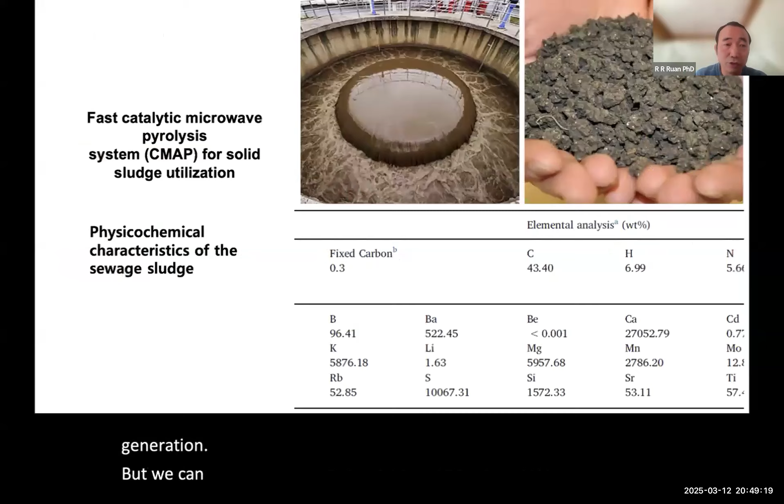In fact, we did a project for Xcel Energy, which is our local utility company supplying electrical energy. We are converting all kinds of municipal solid waste and other sludges into syngas, which can be used for electricity generation. So these are syngas production systems.

We can also use a fermentation approach to utilize this kind of syngas. These are some of the syngas fermentation systems. We convert the CO and hydrogen, and grow different bacteria to produce acetic acid and other chemicals.

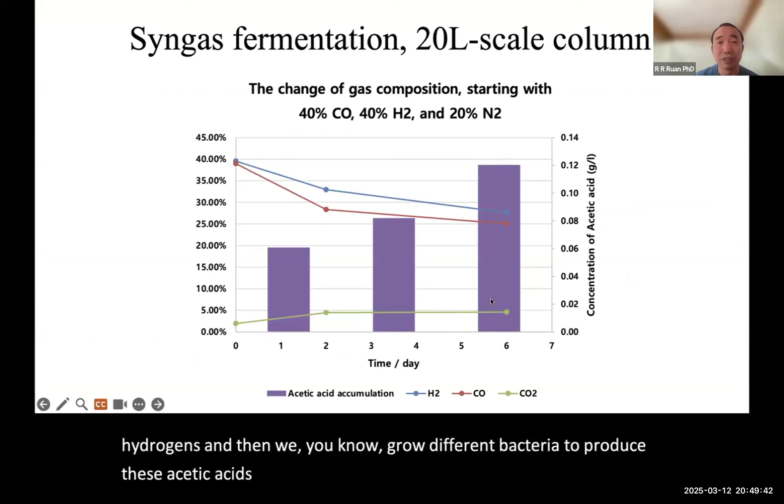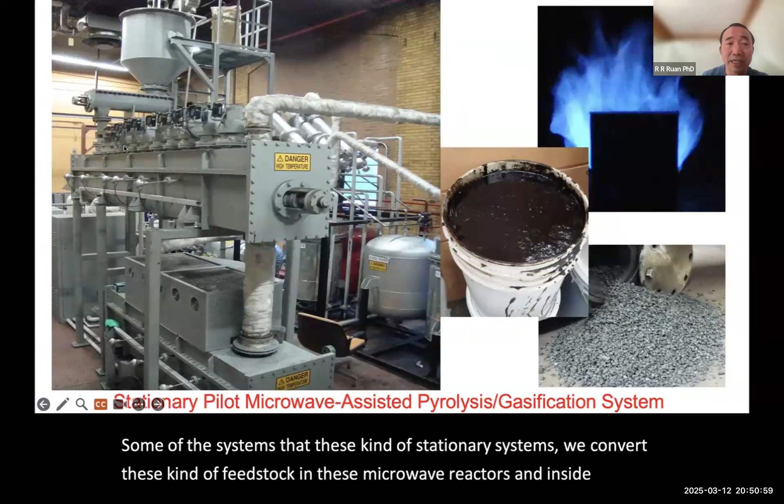So we develop these kinds of systems to convert waste plastics into fuels, chemicals, and materials. I'm not going into much detail, but in these stationary systems, we convert the feedstock in microwave reactors, where it is mixed with different kinds of microwave absorbents. These are the microwave generators.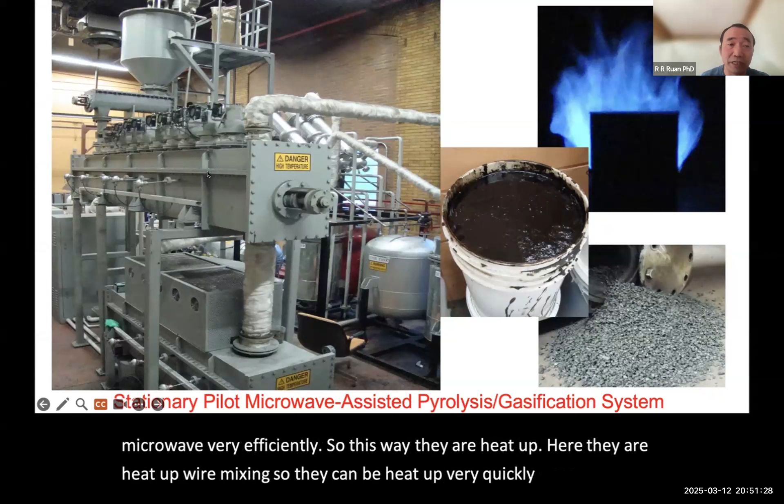The materials coming in here can be heated up by the microwave or by the microwave absorbents, the microwave susceptors inside, because not all materials can absorb microwaves very efficiently. They heat up while mixing, so they heat up very quickly and very uniformly to produce bio-oils, biochar, or syngas. When you heat them up, you convert them into volatiles, which go through catalytic reforming before condensation to produce the oils. The char goes down here and can be gasified if needed, or simply come out as biochar for filtration and absorption purposes.

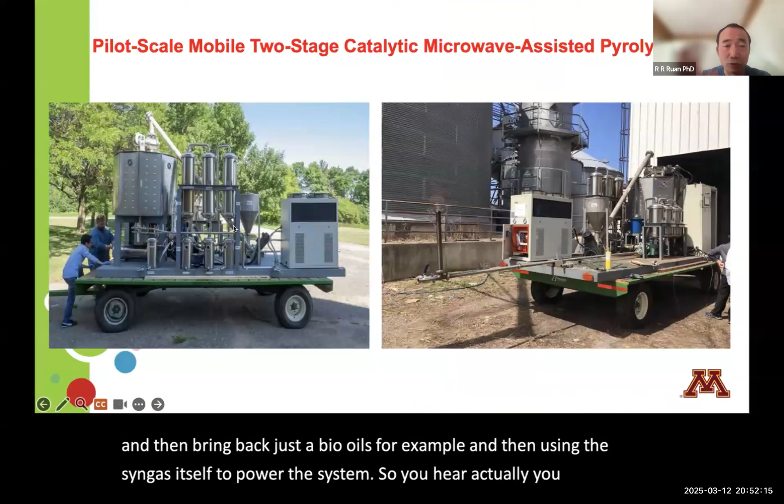We also developed mobile systems, so you can go to the field, convert all kinds of waste on site, and bring back just the bio-oils, using the syngas itself to power the system. You don't see it here, but we have syngas electricity generation systems, so the system can power itself.

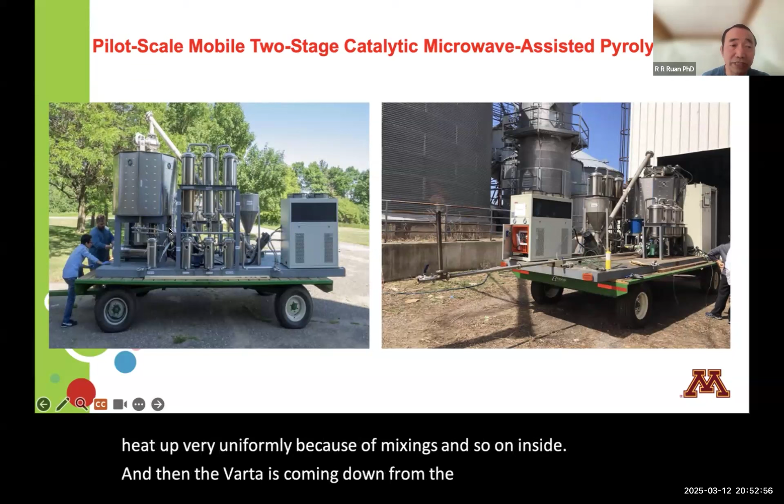This one is a little bit different. This is a downdraft system. Raw materials come down from the top and are heated by the microwave while mixing with the microwave absorbents inside this reactor. The magnetrons are on the side here. They are heated directly by the microwave and by the absorbent, so they heat up very, very fast and very uniformly because of the mixing inside. Then the volatiles come out the bottom, going through catalytic reactions before condensation.

This technology is licensed to a company called Resynergi. They developed a five-tons-per-day system for waste plastic utilization for fuels and chemicals production. This kind of system could potentially be put on a boat to go to the ocean, collect plastic materials floating there, and bring back just the liquid fuel and materials.

Now in landfills, there are a lot of issues with PFAS and micro- and nanoplastics too. And landfills have other issues. A lot of small and medium landfill sites don't collect all the landfill gas. So landfill gas, methane and CO2, just goes into the air, wasted, not really utilized.

And then these organic waste, they continue to break down under the sun, under the rain, and so on. So there's a lot of leachates going into here. In this case, it's collected here. So these leachates contain a lot of PFAS coming out of these, and then micro nanoplastics and so on. And then because of the organic waste, there are also a lot of CODs, a lot of phosphorus, nitrogen and so on, right? So there's a lot of issues.

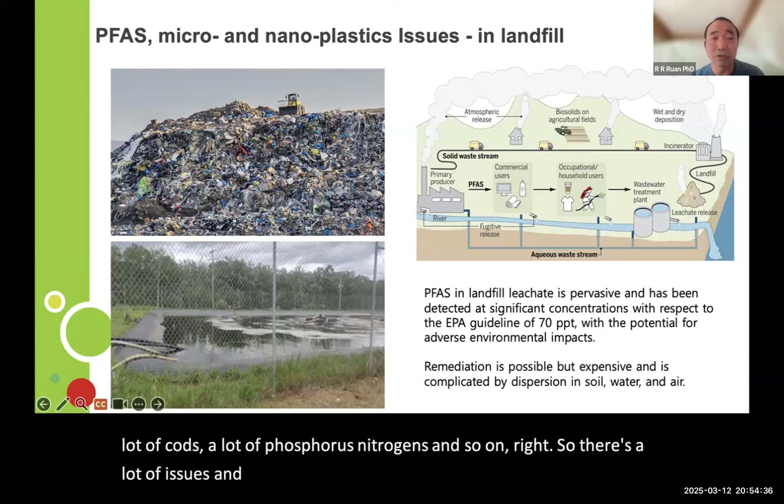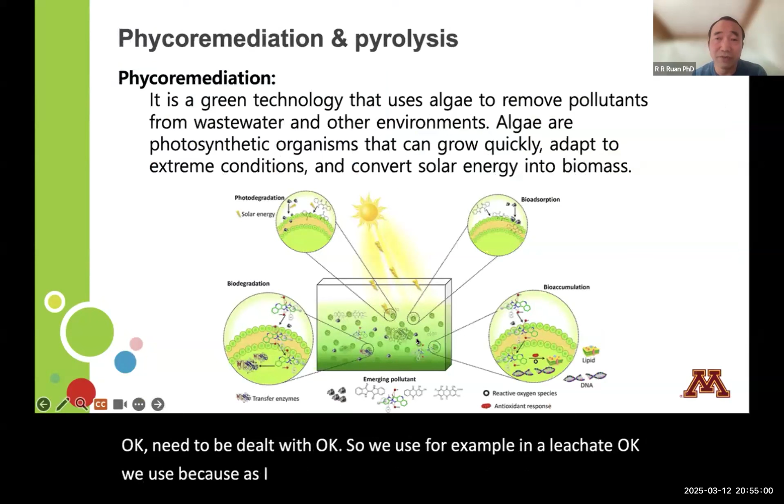And then landfill sites also have long-term sustainability issues because very soon these landfills will probably be out of space for adding more landfill waste. So all these need to be considered, need to be dealt with. So for example, in a leachate, as mentioned, this leachate contains phosphorus, organic COD, nitrogen, and contains PFAS and micro nanoplastics and so on. So we grow algae to try to remove them.

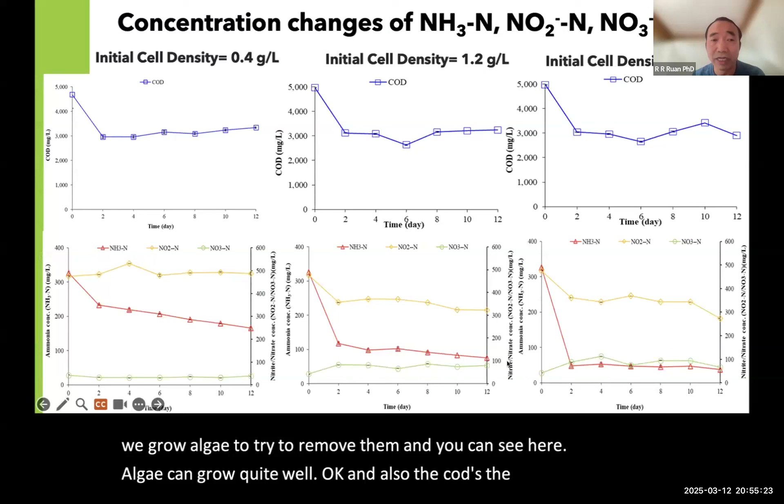And you can see here, algae can grow quite well. And also the CODs, the ammonia, nitrate, and so on can actually continue to come down. And different components can be incorporated into protein or oils inside these algae. And because PFAS is very complicated, they are positively or negatively charged. So when we harvest the algae, we also use an electric field type of method to harvest them, so both positive and negative charged PFAS can be removed at the same time.

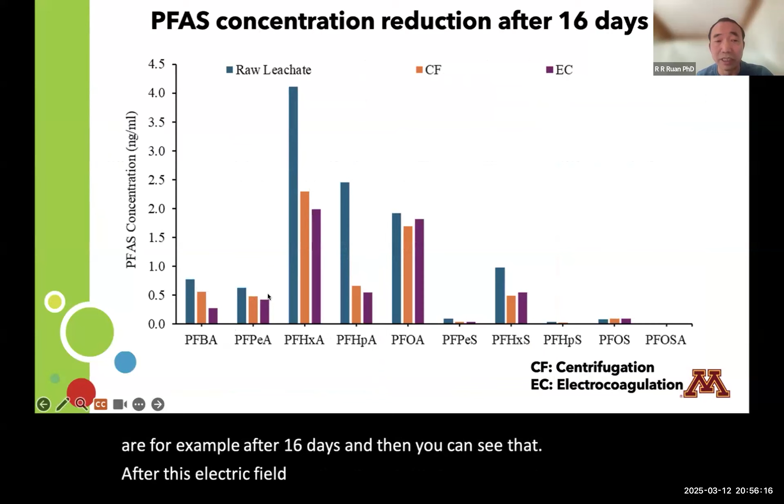So after the algae harvesting, we can also use biochar to further absorb and remove remaining PFAS in the leachate or wastewater. So these are, for example, after 16 days, and you can see that after this electric field harvesting, the reduction of different types of PFAS. And after that, because PFAS are so-called forever chemicals, even if you harvest them, even if you concentrate them, they will not break down easily. So you have to break them somehow.

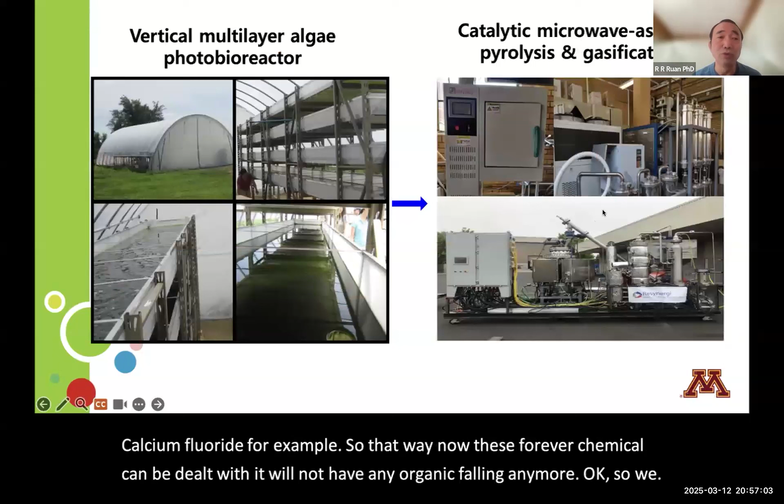So what we did is we pyrolyze them, we add in calcium oxide, calcium hydroxide, and so on, so that we can convert this organic fluorine into inorganic fluorine, like calcium fluoride, for example. So that way these forever chemicals can be dealt with. It will not have any organic fluorine anymore. And we also can use this to treat the landfill organic waste, so that we can reduce the volume of the landfill waste and actually deal with PFAS and micro nanoplastics from the source.

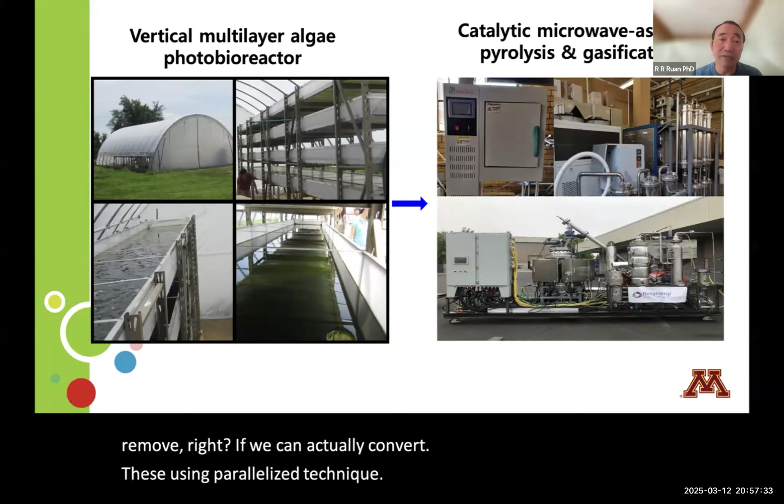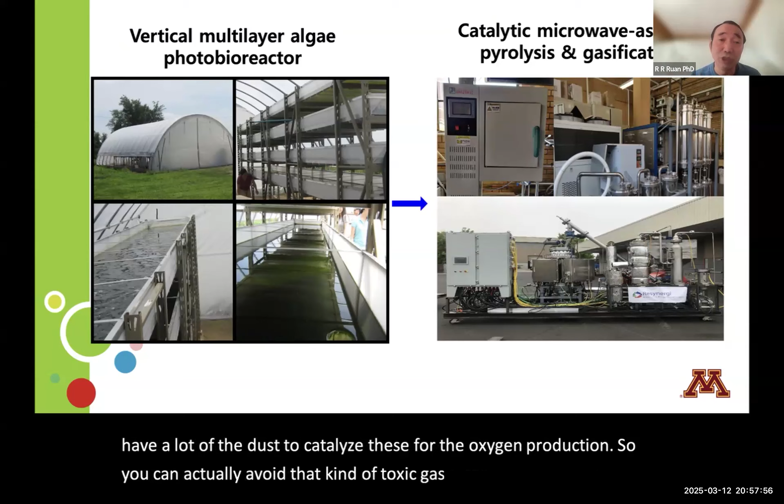Because we prevent it from breaking down into PFAS and micro nanoplastics and going into leachate, which we have to remove, right? We can convert these using the pyrolysis technique, which is actually best for plastic waste and so on, because if you simply burn it, you produce dioxins, which are highly toxic. But with pyrolysis, there isn't much oxygen and not a lot of dust to catalyze dioxin production, so you can avoid that toxic gas production. And you can reduce the volume to improve the life of the landfill site.

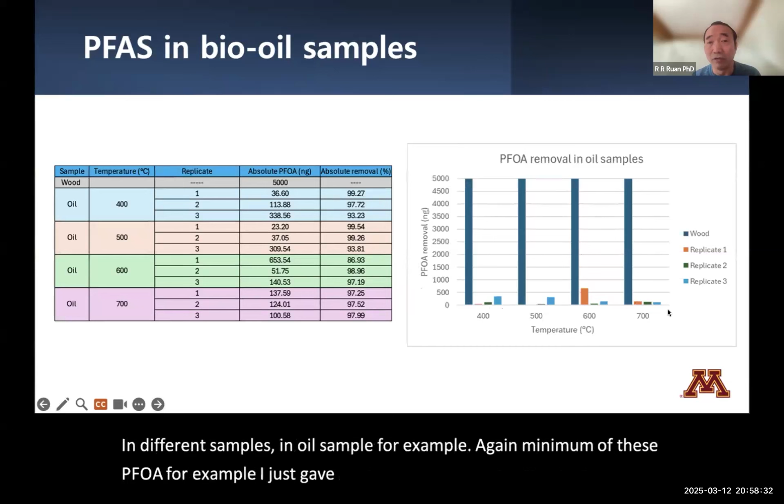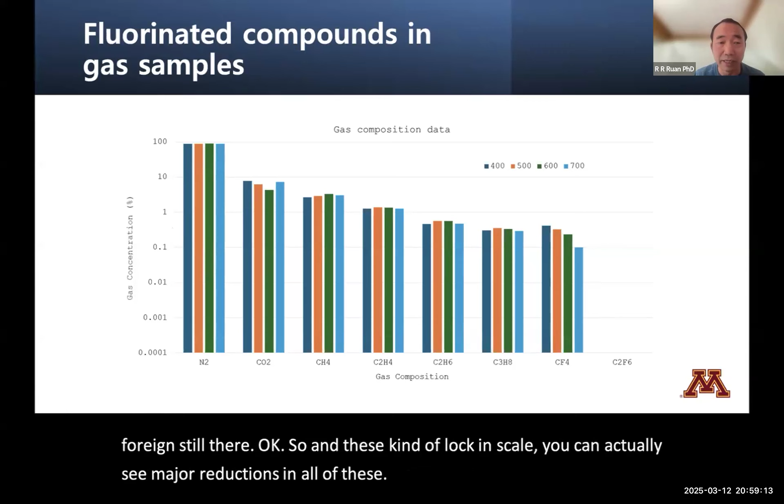And on this log scale, you can see major reductions in all of these unwanted gas components. So basically, using this kind of integrated approach, you can remove the nutrients in the leachate, reduce the volume, and avoid PFAS and nano and microplastics from the source.